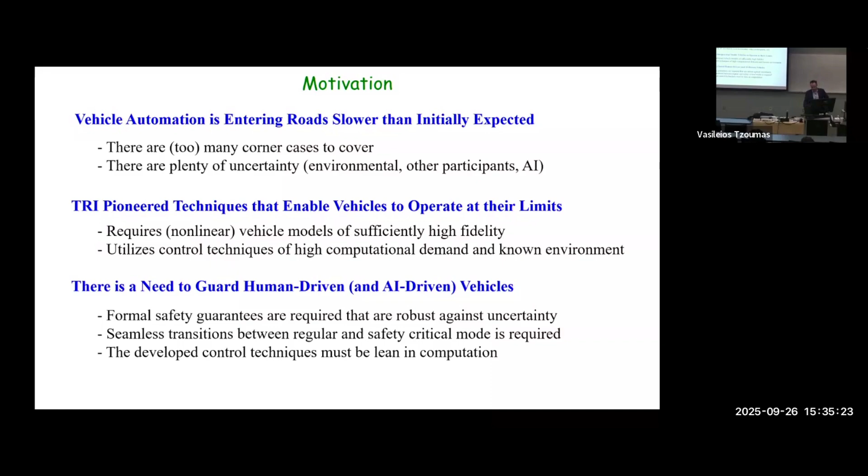When we talk about safety, we're typically interested in a part in a state space. So you have to define the state space. You need to figure out what states you are interested in.

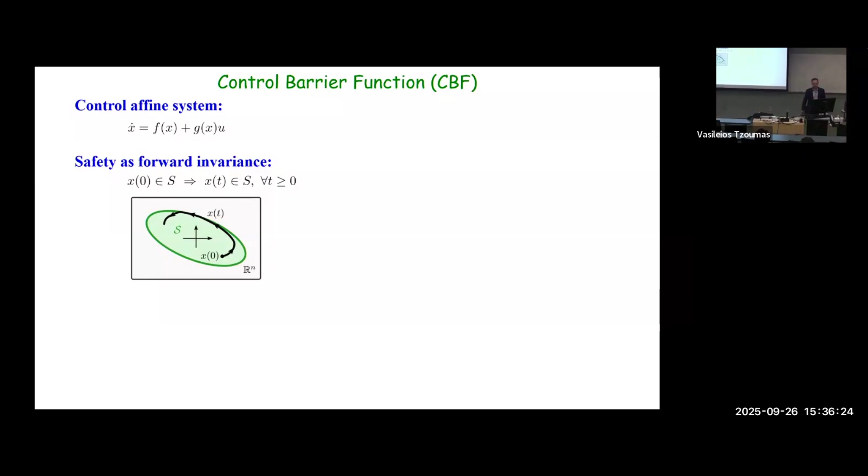The tool we use is called a barrier function, or control barrier function. The idea is that if we are in the set, we're safe. If we are outside of that, we are unsafe. So if we define a scalar function which is positive inside and negative outside, then we can characterize safety, and we can also somewhat characterize how safe we are.

For example, in this case of this ellipse, you can build this dome. It's just a scalar valued function, and we want to make sure that this function stays positive. So we can turn this idea of staying in a set into making something positive, going from something which is potentially high dimensional to something which is just a single dimension.

The advantage of this is that we can actually have a nice condition for it. So I framed it here — this is what people often call the barrier certificate. If that is true, then we know we are able to maintain the safety, and we can use it as a constraint on an optimization problem.

This is an instantaneous optimization problem, which is basically saying I'm trying to see what is the deviation of my control input from my desired one, and then I just take the minimum. So if there is no constraint, then I just use the desired controller.

Where does the desired controller come from? It can come from the human, it can come from the AI, it can come from some other control algorithms. In general, this method doesn't care about it — it allows you to do the control on top of it.

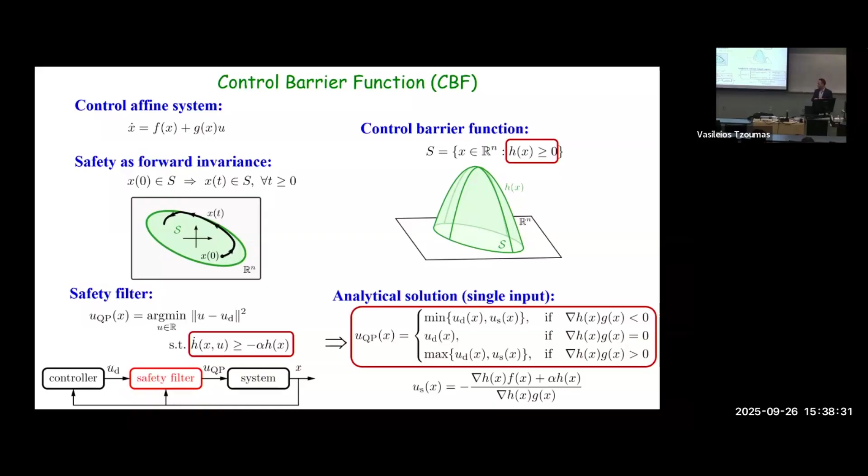The nice thing about this algorithm is it's very simple. Often you can actually solve it analytically. For example, I'm showing you the analytical solution for the single input case. Even for multi-input, it's not much more complicated. You can see that basically what happens is that depending on this derivative being negative, zero, or positive, I have three different algorithms.

In particular, when this is equal to zero — and this will come up later — then I'm using my nominal controller. When it's negative, I'm just taking the minimum between my desired controller and the safety controller, and I'm taking the maximum when this is positive. That's simple — this is three lines of code, or four if you wish.

The nice thing is that this safety critical controller is also just a very simple expression. You can get it analytically, and you can run it on any hardware basically as fast as you want. That's kind of the advantage of this methodology — it's very lightweight, and it can be put on pretty much anything.

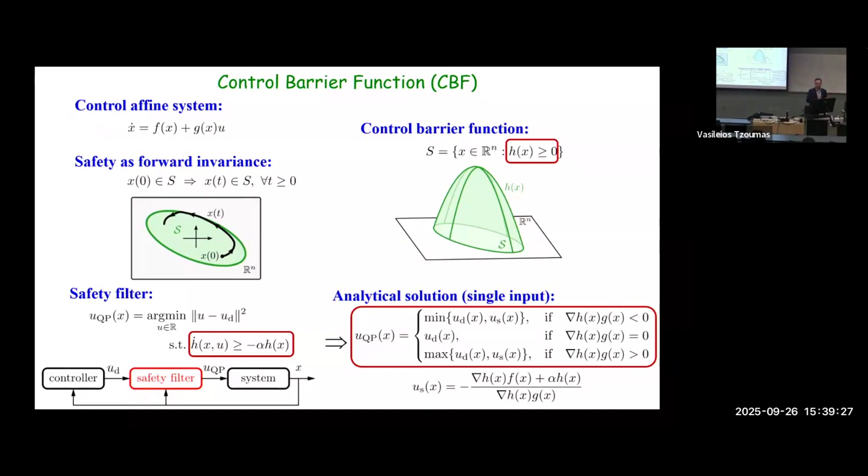So if that's roughly clear, then let's try to put it on a vehicle. Turns out it's not that simple as we think. But we started with the simplest possible model we could imagine for a vehicle, which we refer to as the kinematic bicycle model. In this case, we imagine that the rear wheel is kind of rigid — there is no side slip on the rear, and the front wheel is also rigid.

There's no side slip at the front, so this model can be described by only 3 coordinates: the position of a particular point of the body. In this case, I chose the rear wheel center because that keeps the model simple. And then I'm going to also use the yaw angle to give us the orientation. So this tells us where the vehicle is in space and what its orientation is.

As a matter of fact, I'm only going to use two of these three states because I want to keep this vehicle in the lane. So I'm only going to use the yaw angle and the lateral error. This gives us a control-affine system, so we are in the game, right? There are only two states. This system is nonlinear - we have a sine psi here.

And even if it wasn't nonlinear, through this CBF we will make it nonlinear. So even if you try to put the CBF on top of a linear system, it typically makes it nonlinear.

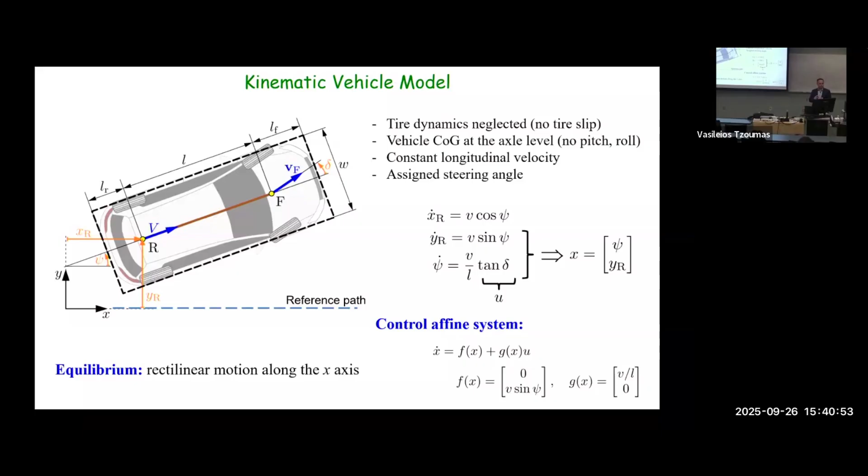Now I talked a lot about this nominal controller, which can come from different places. So we came up with probably the simplest possible one, and this is something which actually many vehicles on the market are using when they do lane keeping.

They basically measure the lateral error, how far from the lane center - that's the Y. They measure the yaw angle, and they basically feed them back with a state feedback proportional controller. Certainly you can do much more complicated things, but this is really something which, if you took linear systems, they talk about this kind of feedback, and then you know how to design it - you can place the poles and so on.

Our goal was not to design this controller to be nice. This is really just there so we can put the CBF on top of it.

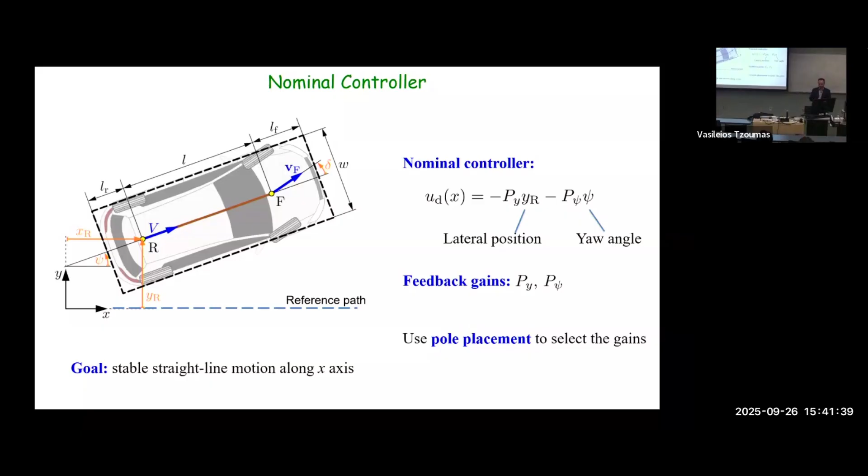Now how do we do the CBF? Well, we need to define safety. And then you can see on the right, I put the vehicle in the lane in 4 different configurations. Those four different configurations are particular because that's exactly when the corner of the vehicle is just sticking out of the lane - these are the kind of border cases.

And if you turn it into state space, you would get this, what I call the exact safe set - this gray parallelogram-looking thing. It's not exactly a parallelogram, it's going to be a little bent. So we quickly made a parallelogram fit, which is nicer, right? The polygon is always more beautiful.

And then as a matter of fact, eventually we put an ellipse into it. So we became a little more conservative because we want differentiability - those corners are typically difficult, and with CBF we have to take derivatives. Now if you want to have another shape to fill it out, you can do that with a higher norm. So that's possible, but today I'm only going to show you the ellipse.

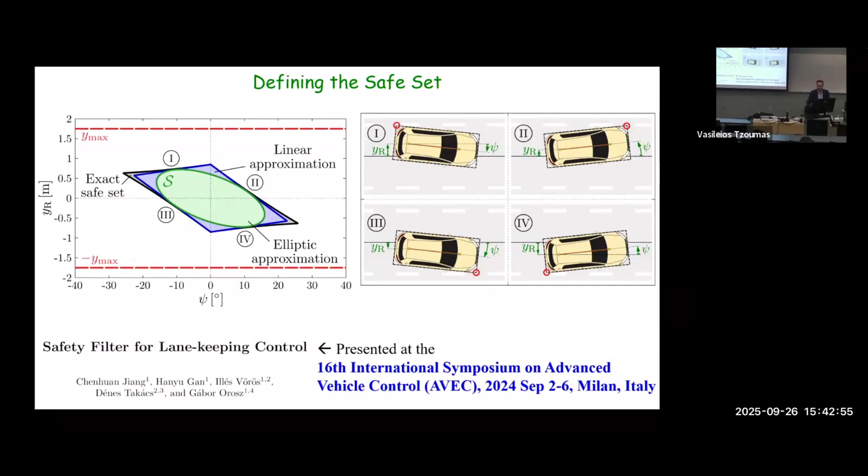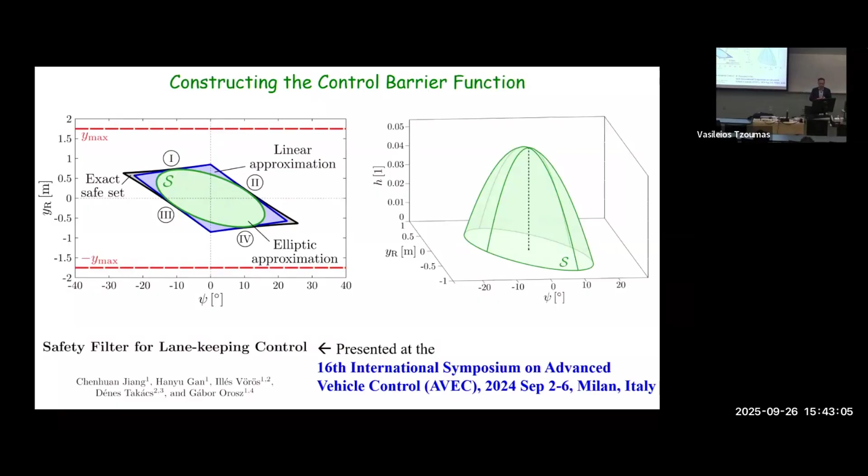So in particular, the 4 sides here are corresponding to these 4 different corner cases. And our goal is to stay in this green ellipse. So as we discussed before, we build a dome that is positive on the ellipse and negative outside of the ellipse.

And this actually has a very nice analytical form - you just write it as a second order function, right? You can see it here, and you can calculate all these coefficients. They are just numbers, right? They depend on the geometry of the vehicle, like what is the wheelbase, what is the overhang in the front, what is the overhang in the back.

So if you have to do it for a school bus in Michigan, those have really large overhang in the rear - you have to take that into account. If you're doing it for a short SUV, then probably that's not a big issue.

And again, the nice thing is that we still have this control-affine system. And in this particular case, you can again calculate this safe controller in a closed form. So this is very nice - you see it's basically a second order polynomial divided by a linear thing, right? And it's very easy to implement in any hardware.

So if I put this together with my nominal controller, then I can do this safety critical control which we discussed, and this is the whole system. So now this gives us a closed loop system, which we can analyze.

Okay, and that's typically a good idea to do, right? You should not stop and say, oh, according to a theorem, this is a proven and safe controller - that's it. You should take a look at it, especially if you want to do experiments. If you want to go from theory to experiments, you typically need to do some kind of numerical or analytical analysis in the middle to make sure that thing really works how you want it to work.

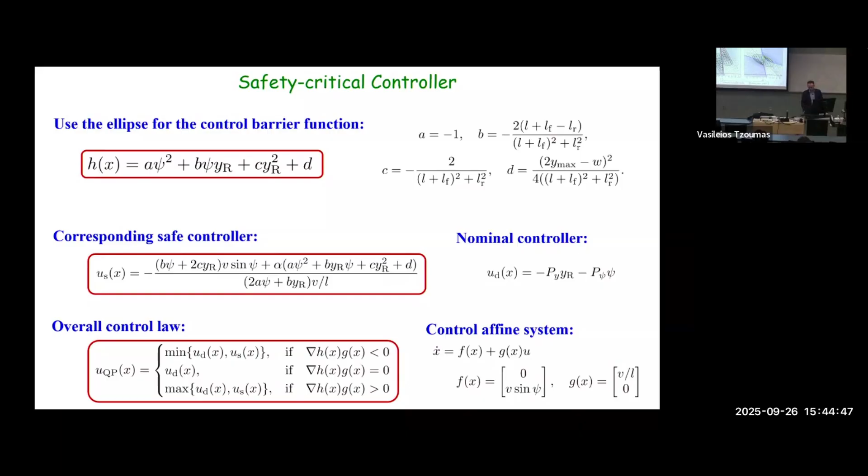So let me show you, for example, a simulation which we did. This is a very simple scenario. Now we can see the green ellipse, and on the left I'm showing you the nominal controller - this is a stable controller. As a matter of fact, for any choice of those two gains, this system is going to be stable.

But as you can see, in terms of safety, it doesn't work very well, right? The red trajectory in particular, emphasized, shoots out of the ellipse and eventually comes back. So that shows that stability may not be enough - you may be stable, but you may still die. So you have to also ensure the safety of the system.

As you can see on the right, this is where we turn on the CBF. As a matter of fact, when we are in the yellow region, there is no CBF turned on - we're just using a nominal controller. It doesn't compromise safety. When we switch to the blue areas, according to those switching laws which I showed you, then we change the flow and divert it in a way that it comes back.

So you can see, for example, for the green trajectory, it enters this domain where the system has to turn on the safety critical control, and then eventually it comes back, and it's also stable - it goes back to the lane center. So we want to make sure that this kind of behavior happens, and it doesn't just happen in our simulations, but it also happens in experiments.

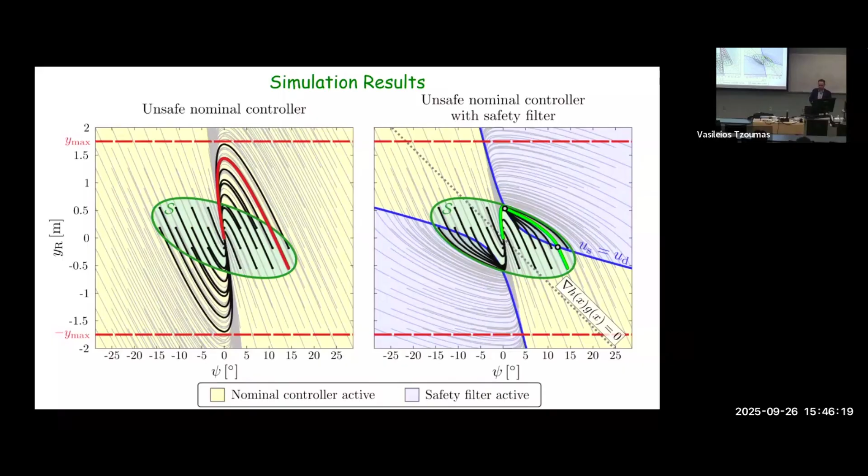Luckily, our collaborator TRI has a very nice platform - this is our kind of workhorse. This vehicle is very capable, and we're not even using all of its capabilities. It has four hub motors, so all the wheels are independently driven. It has front steering and rear steering as well, so you can steer both the front and the rear - you can do a crab walk if you want. And it's fully electric, so it's very easy to accelerate and so on. That's a nice platform.

And this is what we use. Now, of course, we needed to initialize the system such that we can match the simulation which I showed you. In the initial phase, we just ran it up, and then eventually we turned it on. The nice thing was that at that point we could just draw our own lanes - we didn't actually have to do it physically or with sensors. The vehicle just believed that's where the lanes are. So let me show you how it worked.

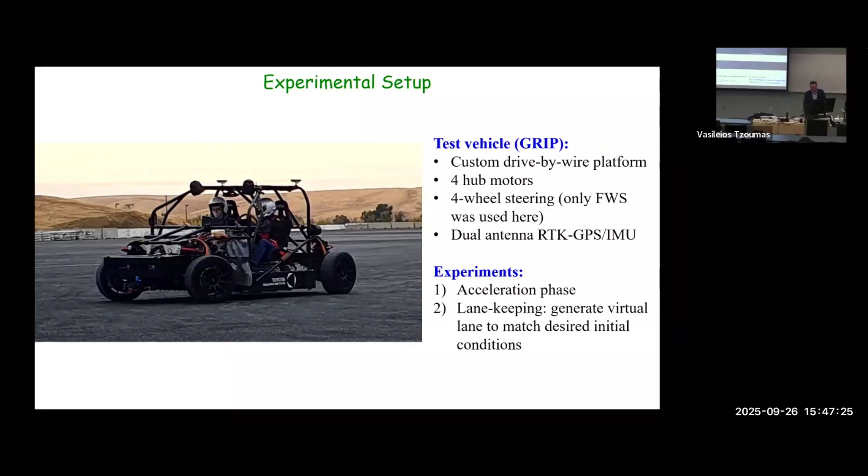So this is the drone footage. At the beginning these lanes were not there, but quickly, at the initial condition, they are drawn. You can see, in particular at the beginning, there is some difference - the nominal controller leaves the lane. Then eventually it decays in its motion, but it's definitely not safe.

When you look at the safety filter on top of it, then you see there are those blue trajectory parts, and that's the time when the CBF kicks in. Otherwise, the system is just using this simple nominal controller - it's a very simple switching rule between them.

If you look at it in state space, this is how it looks. This is the ellipse where we want to be. As you see, we didn't exactly stay in the ellipse - obviously there are modeling errors here, since we're using a kinematic bicycle model. But we definitely didn't shoot that far as the nominal controller would have done. So you can see here that we switch, and when we reach this boundary, we switch back, and eventually we settle down.

And you can also see the input - here is the steering angle. This is the angle at the road, so we call it the road wheel angle. That's about 10 degrees. Typically, you multiply it by 15, so that means about a 150-degree turn of your steering wheel.

So that's what the vehicle is doing. It's not something crazy, okay? It's definitely doable. We run it at different speeds. So for example, here you can see the experiments ran for 6 meters per second, 8 meters per second,

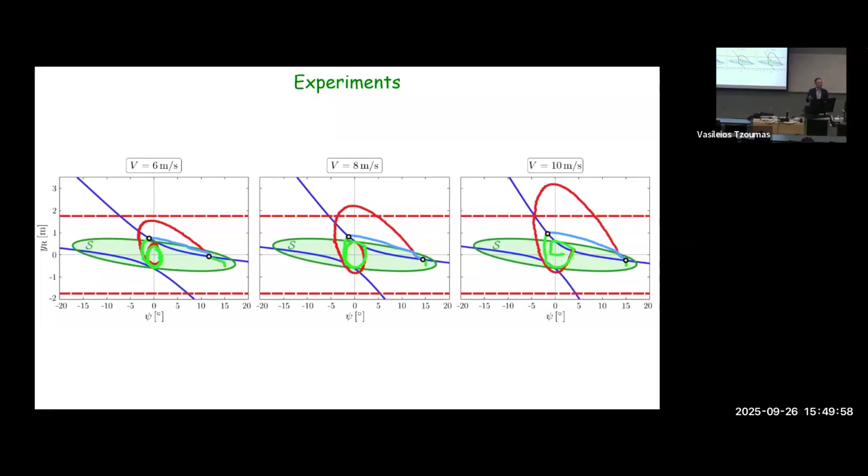So we got excited because we were like, whoa, okay, so it works for this simple controller. What if we try to put it on top of a human? That was the real test because we have no idea how the human drives. He does what he wants to do, okay? So whether we can stay in the lane, that was kind of a good question.

So it surprisingly worked very well. So what you see here again, wherever you see blue, the CBF intervenes. Whenever you see yellow, it allows what the driver does. And so you can also see in the steering angle the red things which the driver is asking, right? But he's not getting it because it would compromise safety.

So you can see it basically tries to ram to the walls, to the lane boundaries, but the CBF actually intervenes and it hands it back. In this case, actually, we stayed in the ellipse. And one reason is that our initial condition was actually less abrupt, right?

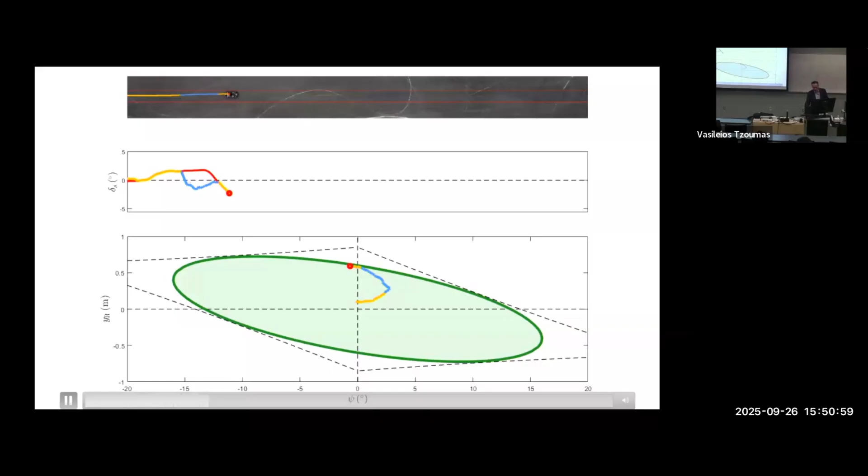So in the previous example, we deliberately put the vehicle in a really weird high angle scenario in the lane. And in this case, we started somewhere in the lane, in the center of the lane, and then the driver was trying to pull it out or not, okay? And this actually worked even for higher speeds. So you can see that I'm showing it for 6, 8, and 10 meters per second. So this worked more robustly, okay?

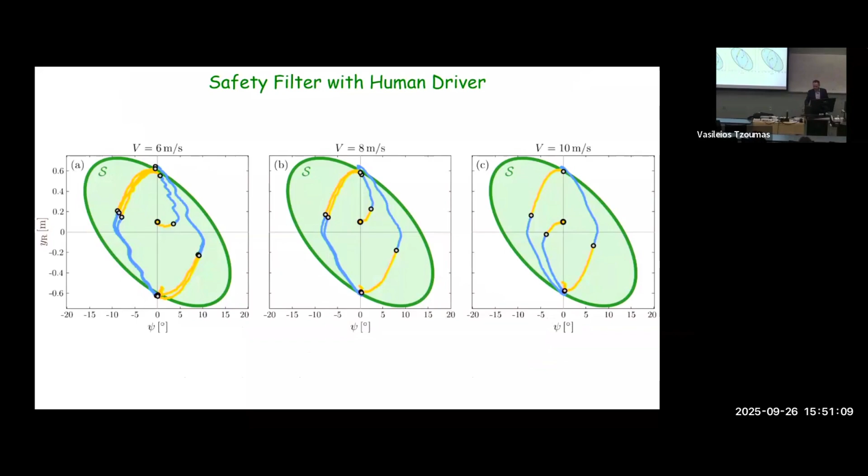So the way I like to show it is this is when the vehicle is coming toward you. As you can see, there are no drawn lane marks. So the driver just kind of feels out where the lane is. And then he's trying to get the car out of the lane, but the CBF doesn't allow it, right? And at the end, he's actually getting pretty wild.

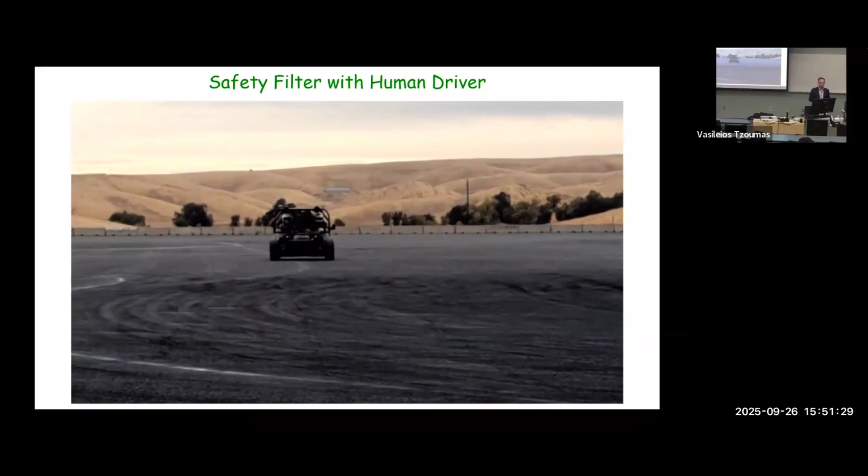And this is when I learned that you know, be careful when you go to California in November. It could be really, really cold. It was about 5 degrees centigrade. Sitting on that car was super cold, right? But it was super fun, I have to tell you.

Okay, so hopefully this demonstrates that these techniques are useful and they can be put on real hardware relatively quick. So I have to tell you, this was the first experiment in my life when we went there, we put the code on the vehicle and it worked the first time. First time worked. That's very rarely happens, right? That's not typically how we do experiments, okay? So it was very robust and we were very happy about the results, of course.

Okay, so what are we missing here? Well, quite a lot, right? I mean, that kinematic bicycle model which we use for our design, this is a model-based design after all. Actually, this is an important point. Safety must be model-based, okay? Whatever that model comes from, it could come from first principles, it could come from some learning, but there must be a model there.

Otherwise, you won't be able to do safety, okay? So the idea that you're gonna go into a ChatGPT and tune a couple of gains there and make it safe, forget about it, right? It must be some model there. Again, it can be a data-based model, right? But it must be a model to make it clear, okay? So clearly our model here had some lackings, right? Even for lower speeds, we could see that it was not perfect, okay? What we are really missing is what we call the tire dynamics in vehicle dynamics, okay? So as a matter of fact, we don't have rigid wheels, right?

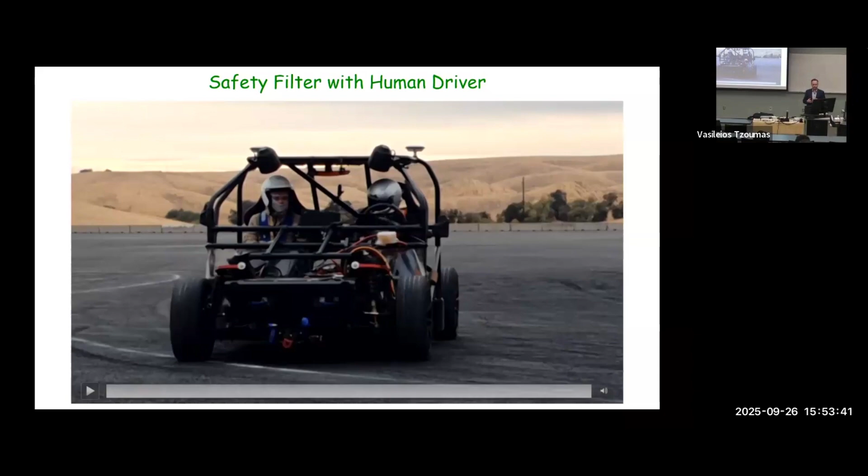This actually gives us a lot of interesting abilities, more freedom to play with. And there are people who do that. For example, these are two guys having some fun. The two particular motions they're doing are actually important.

One of them is called the donut. The donut is when you turn your steering wheel to the left and you turn to the left. And then you also have the drifting. The drifting is when you do the opposite: you turn your steering wheel to the right and the vehicle is still turning to the left.

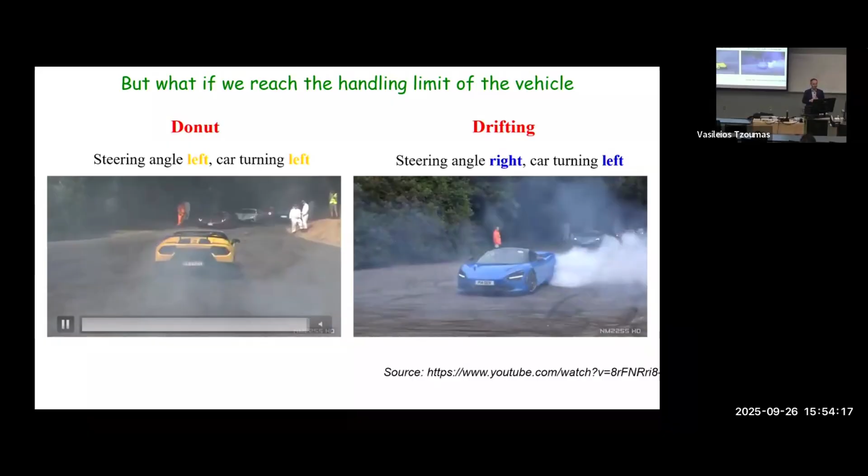That kind of keeps people puzzled, how this can work and how we can do that. Skilled drivers have been able to do it. If you watch movies, typically the first car chase, there's a lot of drifting happening.

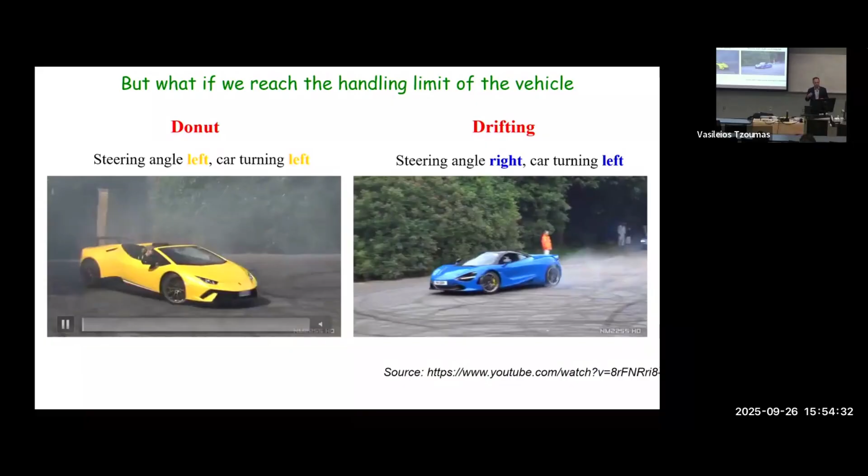One good one is actually the latest James Bond movie, in which James Bond dies. I'm sorry for the spoiler. I messed up, right? But anyway, it's been out there for 5 years or so. There is a very nice car chase at the beginning. You should look at that.

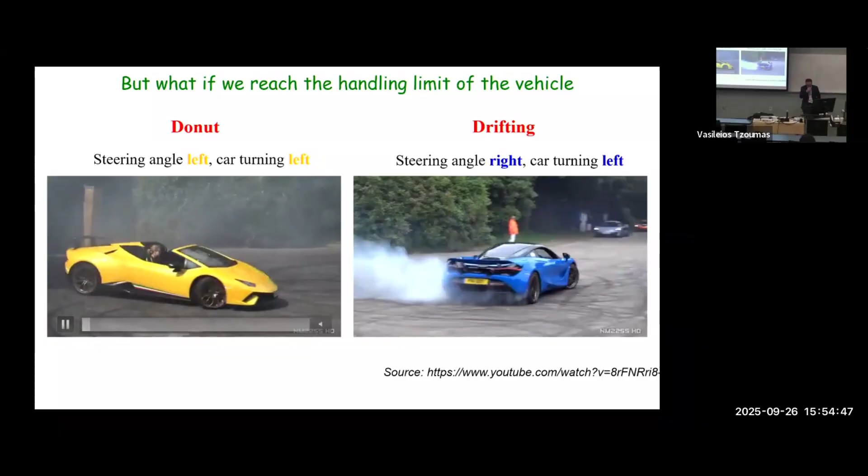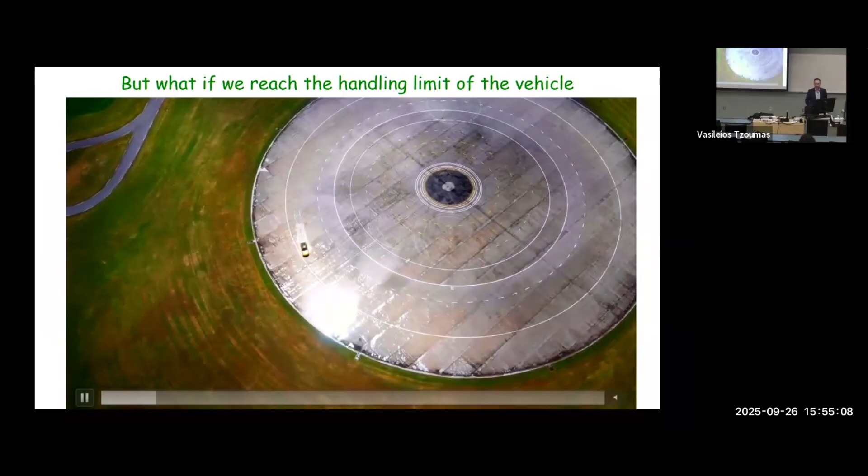We can see there is an additional degree of freedom here to play with. Why is this so hard? A few years ago, this guy, Richard Hammond, tried to learn to drift. He went to France, I think, and asked a professional driver to teach him to drift. So this is Hammond trying to learn the drift.

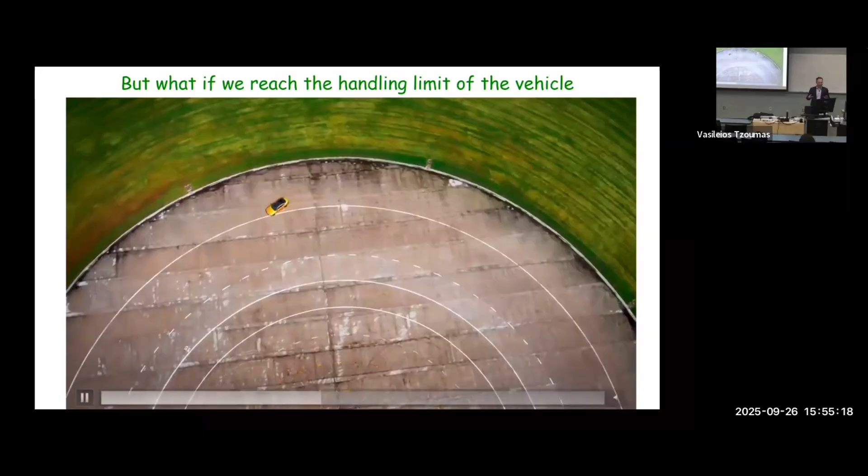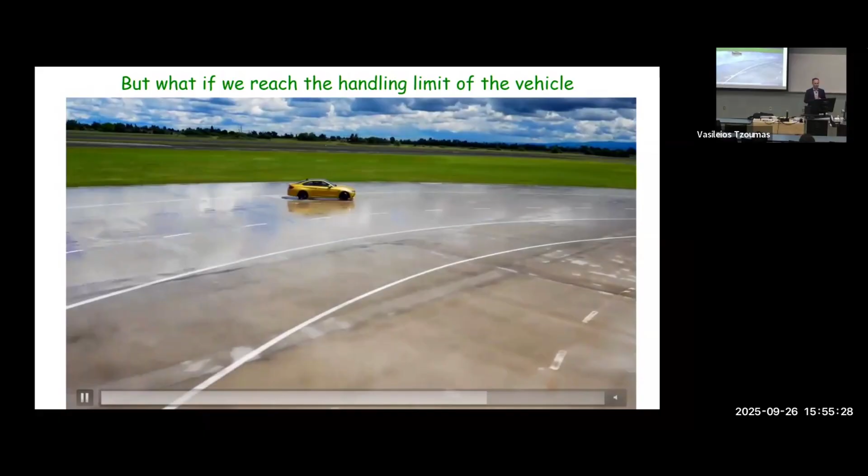You can see there's a lot of movement on the steering wheel, not quite what you want. In general, you want to have this steady motion going on the circle. Well, he's not doing that. The master of drifting trying to teach him keeps failing. Eventually he got it right, but as you can see, the driving instructor was not very happy for quite a while.

So why is this so hard? It's because even though these motions exist, they are actually steady states of our system, but they are unstable steady states. We need to stabilize them, and skilled drivers know how to do it.

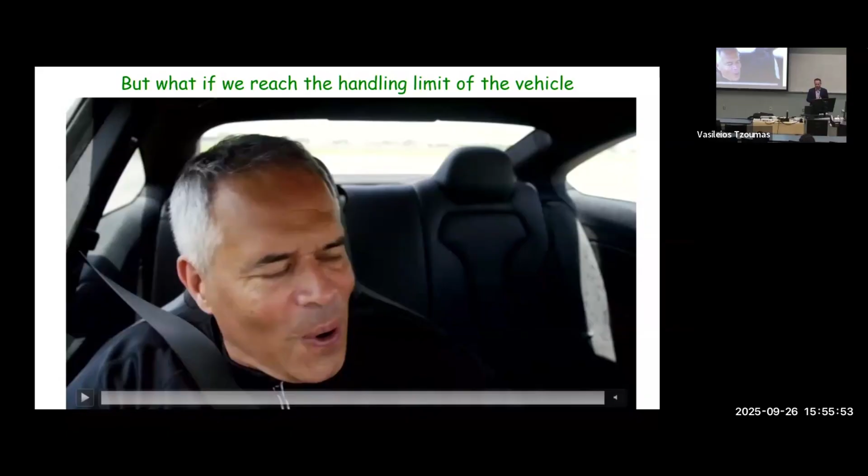Let's try to do it in a control engineer's fashion. So now, who's playing the video? Exactly. I have too many screens here, I'm sorry. Yeah, I have like 3 screens and I don't know which one is which, so I'm a little confused.

In order to do this, as I mentioned, we need a better model. We can't have those tires just rigid anymore. That means we have more states. In this particular case, we're actually going to have 6 states.

We need to have the position of the vehicle. We need to know the position of a point, in this case I chose the center of mass, C. I need to know the orientation, so that's psi. And now I also have velocities.

I have a velocity component that's the longitudinal velocity and the lateral velocity. These are actually done in the coordinate system of the vehicle. And we also have the yaw rate, this omega.

Now we have 2 inputs. As a matter of fact, we are playing with the torque at the rear wheel, and we're also playing with the steering angle. Of course, it's a rear-wheel drive vehicle, and that's when you can have a lot of fun. So I'm putting the torque all on the rear wheel and nothing on the front wheel. You can play more, but this is what we're going to do today.

On the bottom left, there are these 2 new quantities, alpha R and alpha F. These are what we call slip angles. You see now this VR velocity is not aligned with the vehicle body and the wheel. It actually has an angle here, and you can also see it on the front. So there is an angle between them, and that's how we can actually calculate these forces.

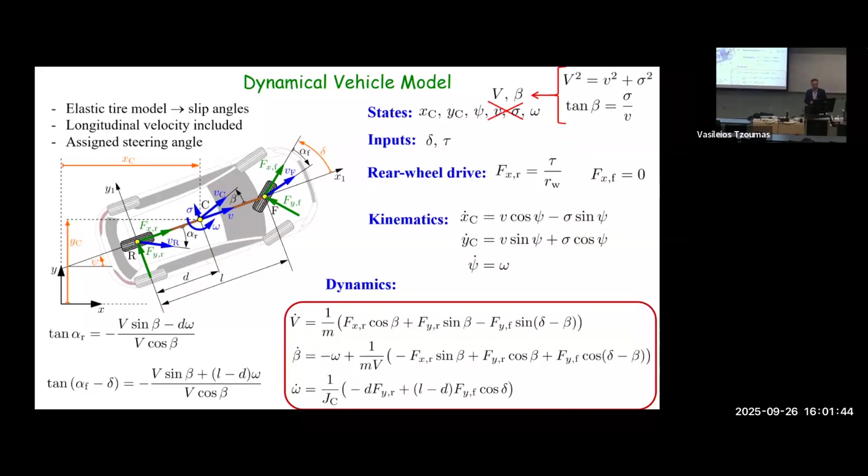So we omit the longitudinal deformation of the tire, but we know that we need some force to push that vehicle forward, and that is kind of taken out of the available lateral force, okay? And we drive it with a torque in the rear. There's no torque at the front. And then the weight is just static weight distribution, okay?

So this used to be a big headache for the vehicle industry because, well, you probably heard about the 50-50 weight ratio. But it was very difficult to achieve it by design because the engine was at the front. It's very heavy, right? So engineers spent a lot of effort shifting weight here and there, making sure everyone is feeling comfortable and so on.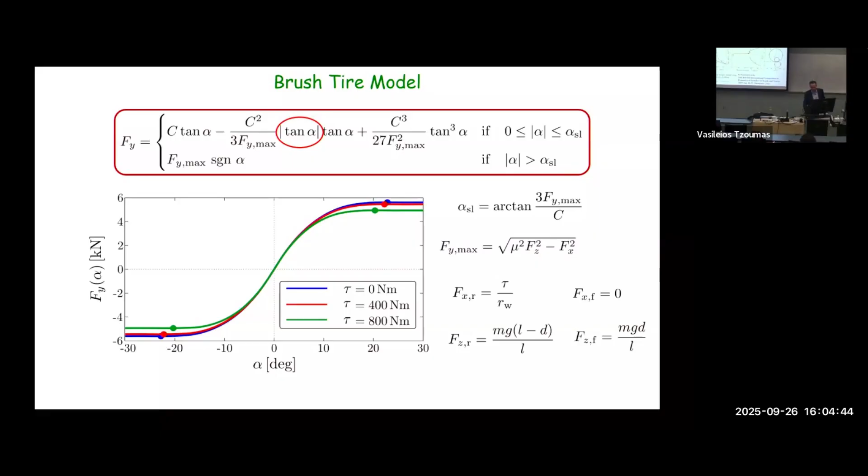Okay, so first, let's take a look at the steady states. This is a tool which we often use in my group, called bifurcation analysis. So what you can actually do is you can take a parameter like the driving torque here, which is just constant. Imagine that I'm putting a constant torque on it, and let's fix my steering angle to 10 degrees. And then I increase this driving torque and find the steady state solutions of that system.

So what you see on the right, I'm plotting the longitudinal velocity. If I start to add more torque in the rear, I'm getting more velocity, right? So my steady state velocity is increasing, up to a point, but here, close to this peak, I'm losing stability and it becomes unstable, okay?

So if you look at, for example, this solution A and solution B, this is for the same longitudinal velocity. A would be this kind of nice weekend driving, right, which you would do on the weekend. But then B is this very interesting solution. It's very narrow, for the same longitudinal velocity. It's actually almost spinning on the spot. That's the donut, okay? I'm turning my steering wheel and I'm doing it.

Interestingly, there is another solution coming here, and this is what we refer to as drifting. You have to have a powerful enough vehicle to have that, right? So above a certain Newton meter, it just comes in. And what it does is actually, it turns the other way, as we discussed. So drifting is turning the opposite direction, okay?

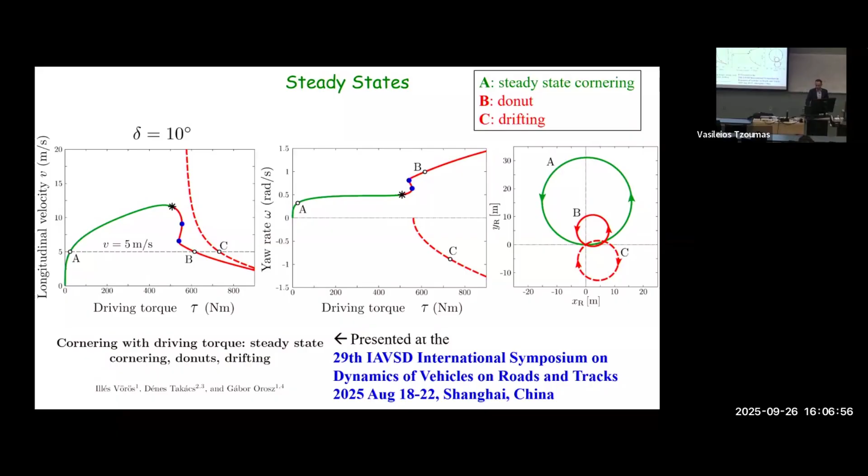What we did was something very simple, as I mentioned. We know where the steady state is. And as a matter of fact, we only have to focus on 3 of the states here. So we only focus on the velocity component, and we focus on the yaw rate. And we don't care about, at this point, the position and the angle. And then we put constant steering angle, constant torque. And then this is standard linear systems.

Who is teaching linear systems? Jeff, are you? No, not this one. No, it's not your fault then. But anyways, but definitely you guys do linearization, right?

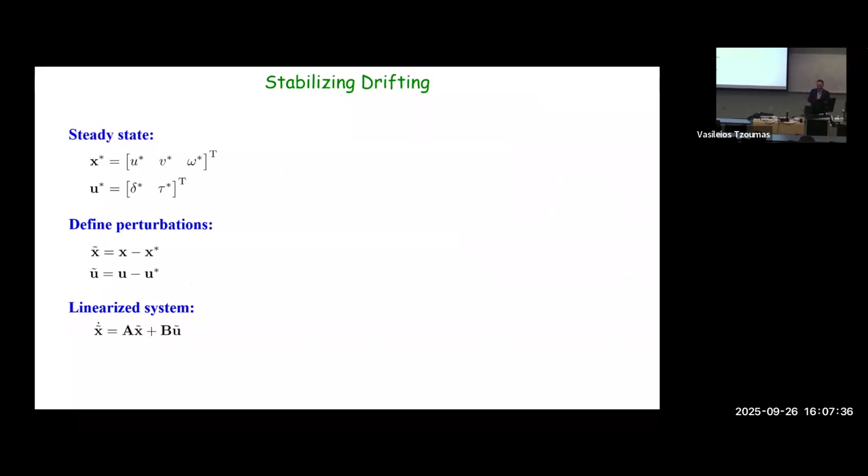So then you got this AB system, and you can shoot it with something very simple like an LQR. That's what we did—we wrote an LQR on it. It's a linear control technique. You solve an infinite horizon LQR, you get your Riccati equation, you get your state feedback. So this is a linear feedback around your equilibrium, and it works very nicely.

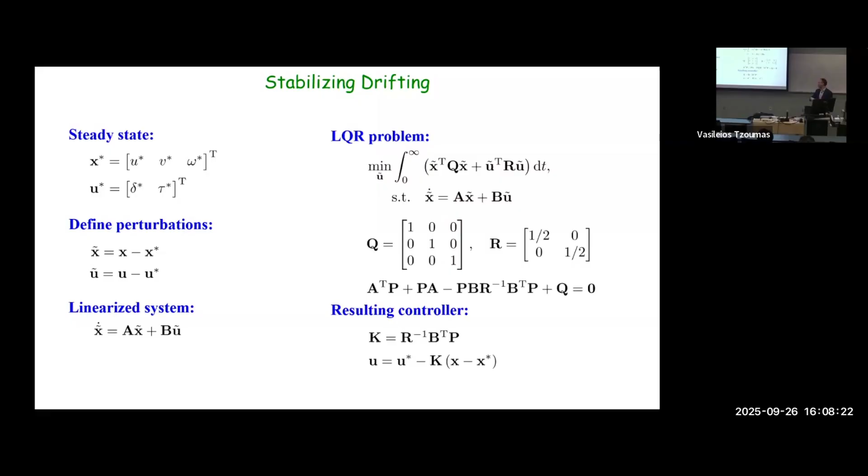Surprisingly, you can actually stabilize drifting pretty much anywhere you start from state space. It's not proven to be globally stable, but practically it is. Why does this work so nicely? Because we had a good model. If you try to do the same thing on a kinematic bicycle model, it would not work. You have to have a model that's high fidelity enough, yet simple enough that I can use this technique—but actually it works nicely.

So this is how it looks. For example, you can see the trajectory on the top left. I start from the middle of this diagram, I increase the speed, I overshoot a little bit—that's okay, I just want to stabilize. And this is the lateral velocity, this is the yaw rate.

This is probably the most interesting thing—what you're doing with the steering angle. The way you often get into the drift motion, you turn your system into close to a donut. You basically turn your steering wheel a lot, get the back of the vehicle to break away, and then you turn the steering wheel back and stabilize. And it does it automatically—this back and forth swing, we didn't code it in. The controller just did it very nicely.

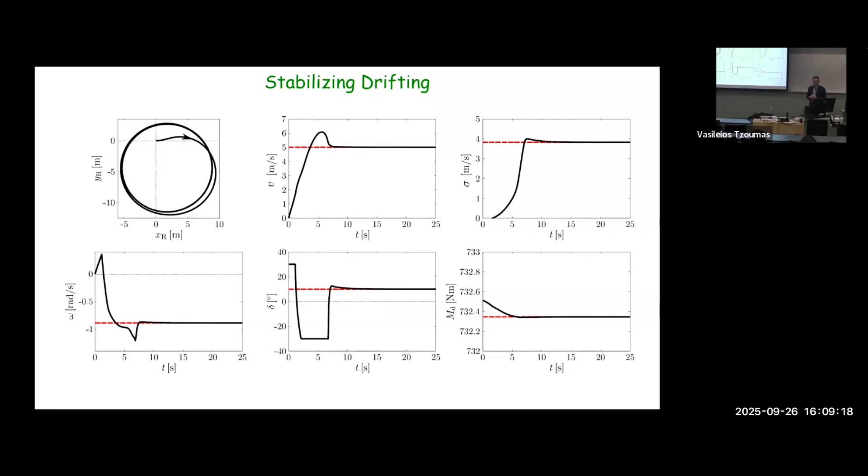It's a very robust thing. As a matter of fact, Professor Chris Gerdes, who was a professor at Stanford University, they actually did it with this kind of old-looking vehicle. Did anyone watch Back to the Future here? That's in the past, as you know—that's already happened. But that's actually a DeLorean, which they took out the engine and everything. That also didn't work so much anyway, it was a bad engine. But then they basically did this controller.

You could see that they could actually even switch between different motions—go from counterclockwise drifting to clockwise drifting. It was really nice. That was about 6 years ago, and since then there's a lot of people trailing it. We just came back from a conference in Shanghai a couple weeks ago—everyone was drifting, everyone was doing that. Why? Because, A, as you can see, you can do it relatively robustly. B, because now we have electric drives and it's much easier to do it. If you try to do it with an internal combustion engine, that's much, much harder.

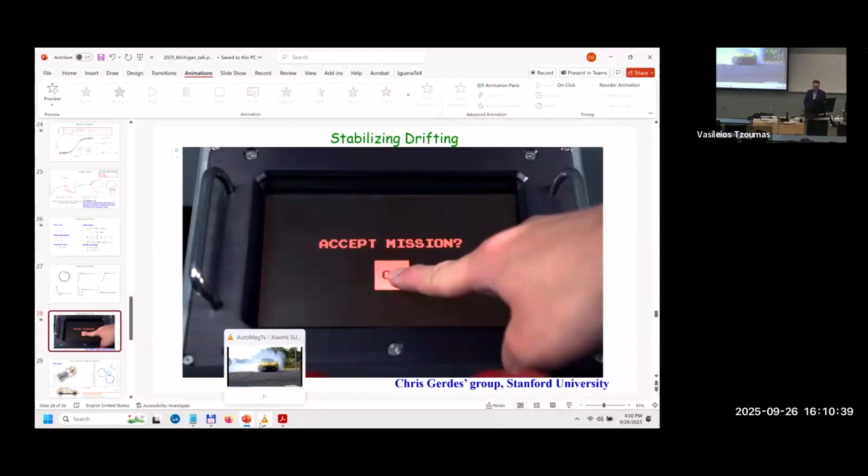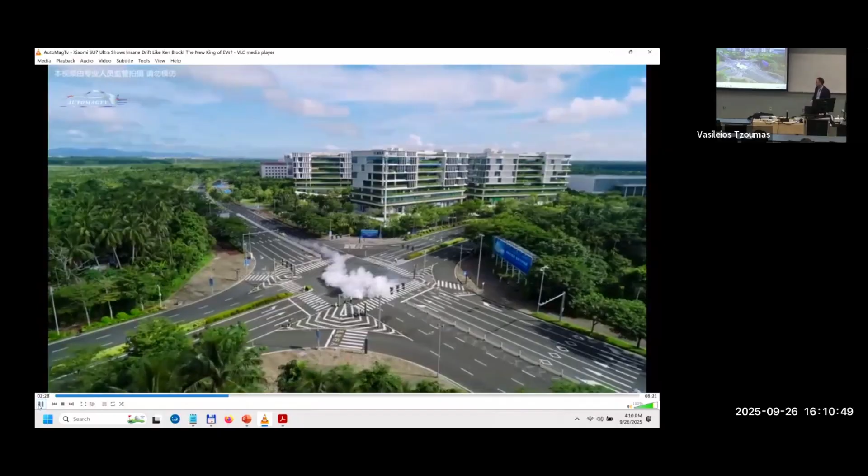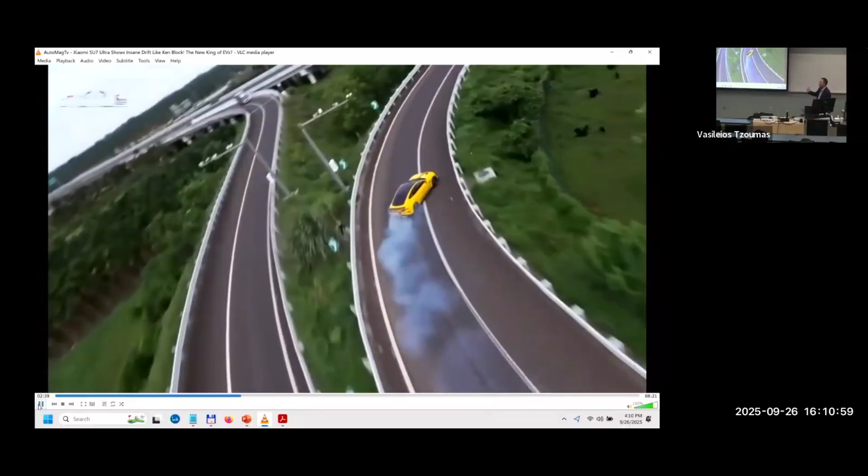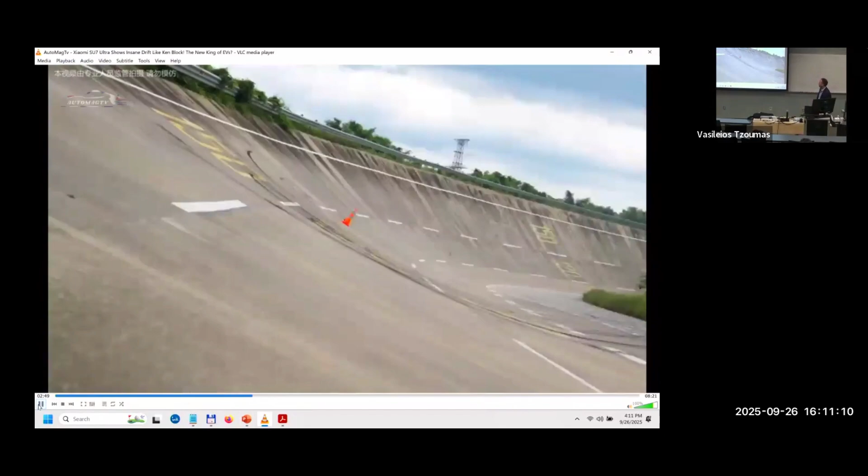So now if you go to YouTube—let me step out here—you can look at this video, I couldn't insert it into the PPT but I will show you. This is the SU7 drifting. A lot of smoke. So he has a handbrake, so he can actually initiate the drift that way. You can download it, it's a cool video.

So the point is, we obviously missed something here. Oopsie, I think I closed my slides—I'm sorry about it, one second. Go back. Yeah, so we were here. We missed something because—

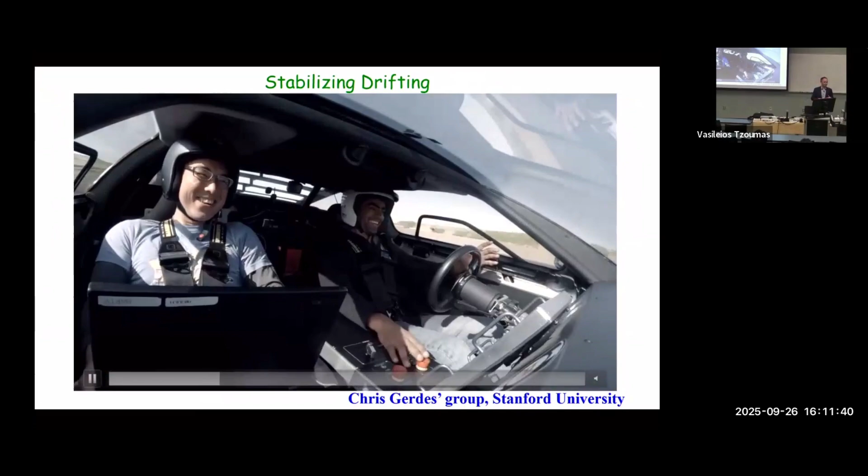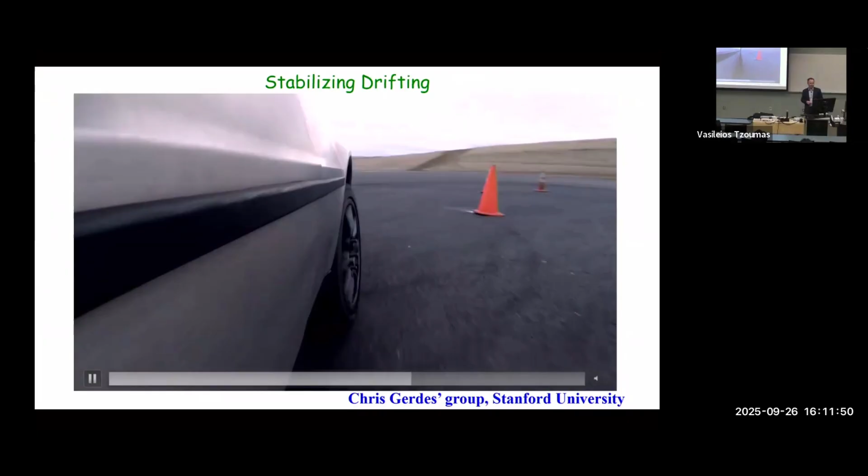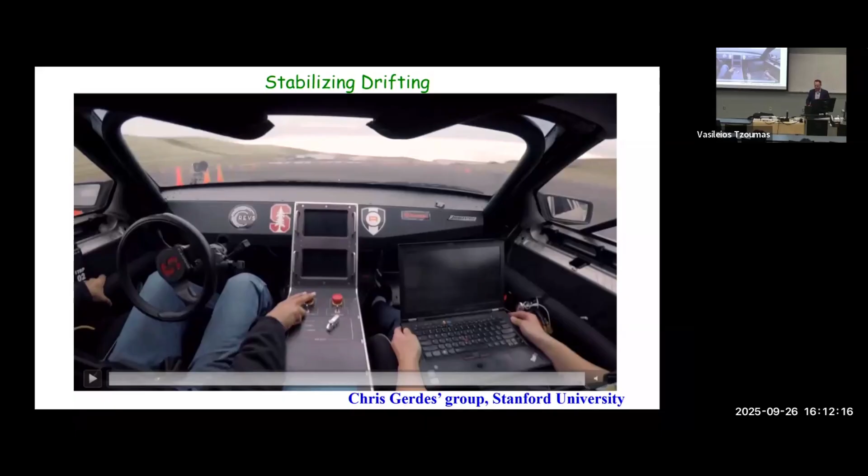Indeed, there is a lot of motion in the longitudinal direction. The smoke comes from somewhere—you're burning a lot of tire. And the model we had didn't really model that very well. The price we pay for that—I mentioned it's relatively easy to stabilize drifting, but it's actually very hard to stabilize donuts. To do it in a stable and controlled way is very difficult. We actually need a better vehicle model for that—we need to account for the wheel speed dynamics. The wheel speed is not going to match the vehicle speed when you're burning your tires, so that's also important. As a matter of fact, if you do that, then the same LQR technique with a few more states—this is a 5 degree of freedom model, so eventually we deal with 5 states—you can actually do it. We didn't do it in real life, but you can do it at least in simulation.

But I started this whole presentation asking where are the AVs? It doesn't look like we're going to sit in one of those soon as our own personal vehicle. Also, I don't think that Google is going to drift in New York City, that's probably not likely. So what we want is that these capabilities, which these controllers are able to do, we would like to make sure that humans can have it or AI-driven vehicles can have it. We don't want them to drift all the time, but we want the vehicle to be kept safe.

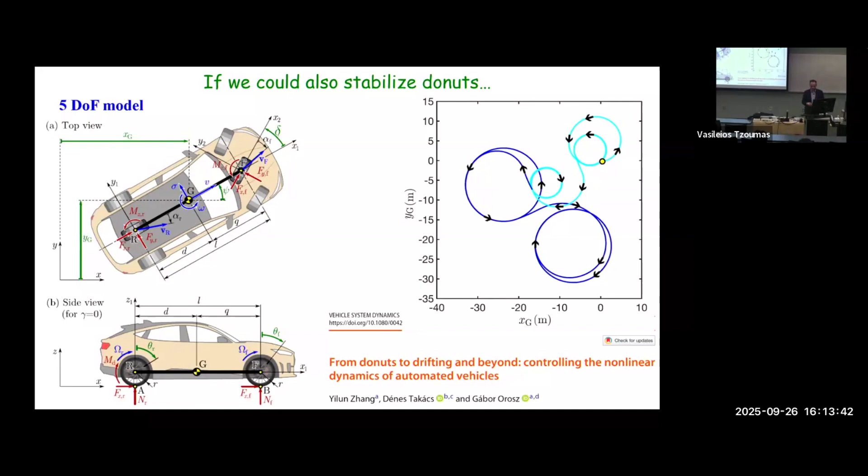So to circle back, we started with CBFs. Now we can do the same thing in the higher dimensional state space. In particular, here we care about this sideslip angle, which I mentioned is related to the ratio between the lateral and the longitudinal velocity, and then also the yaw rate.

John Subosits, who was previously a PhD student at Stanford, figured out that we can actually find these limits of what the vehicle can do essentially as nullclines. So what he did was he basically fixed the velocity, the longitudinal velocity, and then turned the steering wheel to the max, and saw what is that limit, because certainly I can't do more than that, I can't turn the steering wheel more. So those are actually those black and dashed black lines. And then again, to keep it simple, we're gonna put an ellipse into the middle.

So now we deal with 3 states, as a matter of fact, which we care about. We don't care about the kinematics at this point, and 2 inputs. Same scenario works as before, we can actually construct a safety filter. There are little caveats here: now we have more than 1 input, so it's a little harder to solve this optimization problem, but it's possible. It's probably 2 more lines in your code, so it's not a big deal.

The other thing is this gamma here. The way I'm calculating is that I have to weight my cost function, because I'm using here the delta, the steering angle, and also the torque, and they are even different units. So that takes a little bit of tuning to make sure that you are doing it in the right way. If you are able to do it, then you should be able to keep the vehicle in this ellipse, i.e. you are able to keep it safe, not spinning away.

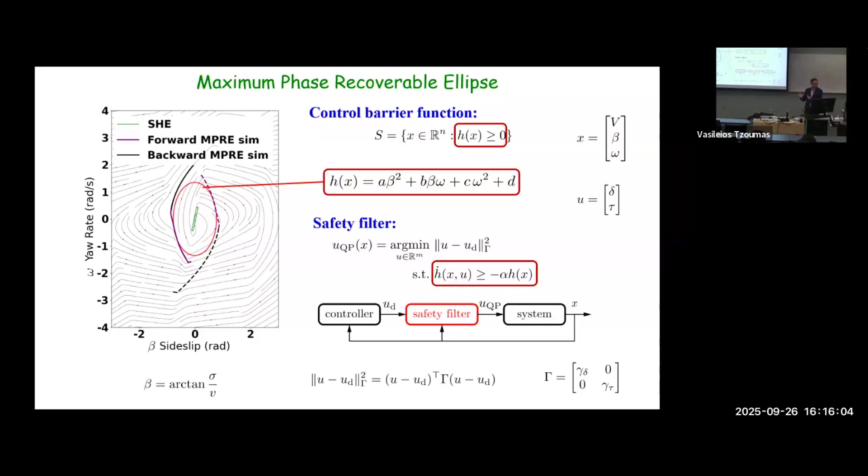Well, luckily, there is something called the dynamic extension, which many of you probably have dealt with before. When someone says, hey, I can't control this signal, but I can control the rate of it, that's a dynamic extension. The same thing happens here, you actually control the steering rate and you control the torque rate, and you got 2 more dimensions to deal with. So we are back to 5, still not huge.

The issue is that in this case, when you try to do the CBF, the derivative doesn't contain U, so actually you can't synthesize a controller. But again, there is a solution for that, we call it higher order CBF. So what we basically do is assign a new CBF, and what you're basically solving is this optimization problem. Now you have the cost function, which is kind of same as before, and instead of a first order constraint for the U, you have a second order constraint for the U. So it's not that difficult to do. Indeed, you have a few more parameters to play with, you do need some, right. If you ever try to run an experiment, you know that no parameter is not a good idea. You have to be able to tune something because then I can actually play with the performance.

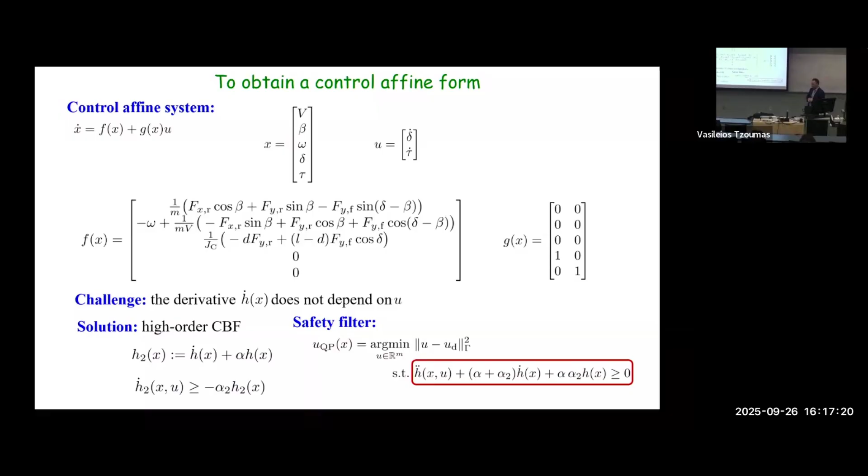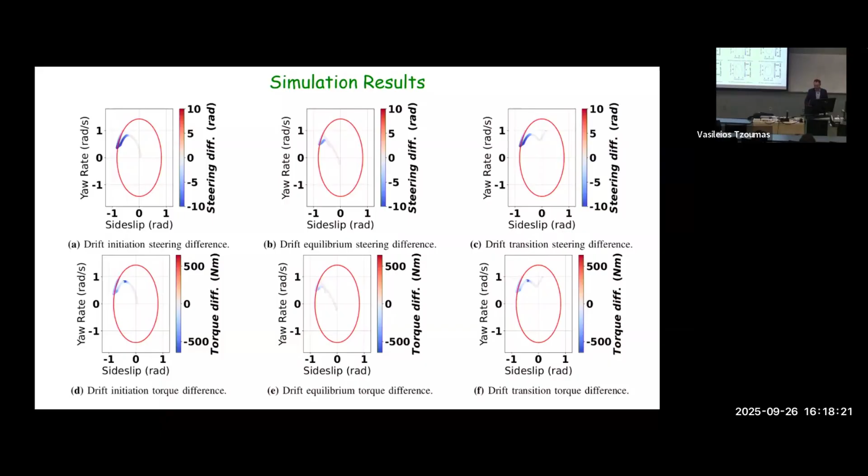And of course, the real test is, does it work on a human? Luckily, it does. My colleagues had a lot of fun with this—they've been drifting for a long time.

These trajectories again show how much steering and torque you're taking away or adding to the system. When you're getting close to those drifting and donut states, shown in the corners, the system starts to kick in. It doesn't just try to stabilize—it doesn't know what you want to do, but it tries to save you from getting out of the ellipse, and it does very nicely.

So the question comes up: how bad would it have been if the CBF was not there? These guys had a lot of fun, but what if I turn off the system? Well, they didn't do that—they wanted to keep themselves safe.

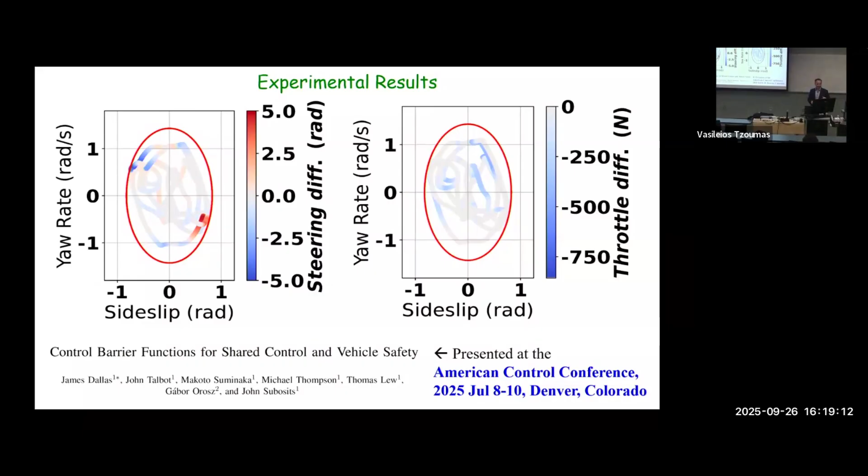Now, of course, we haven't solved all the problems. I basically showed you sub-problems of how to keep in the lane and how to keep the vehicle from spinning out. We have to put this together—after all, we're supposed to stay on the road and also push the vehicle to the limit. But that's probably another control seminar, maybe a few years from now.